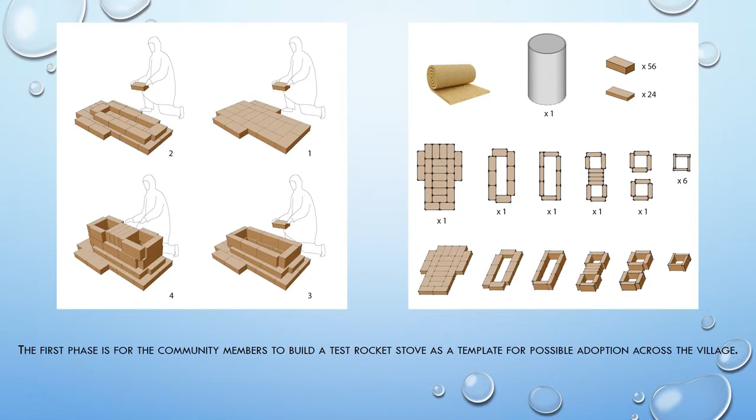It is important for the design drawings to be visually based, requiring few words to be understood. The first phase is for community members to build a test rocket stove as a template for possible adoption across the village. The hope is that eventually the rocket stove will provide a way to heat all the homes and provide supplemental heat for the laundry and hammam.

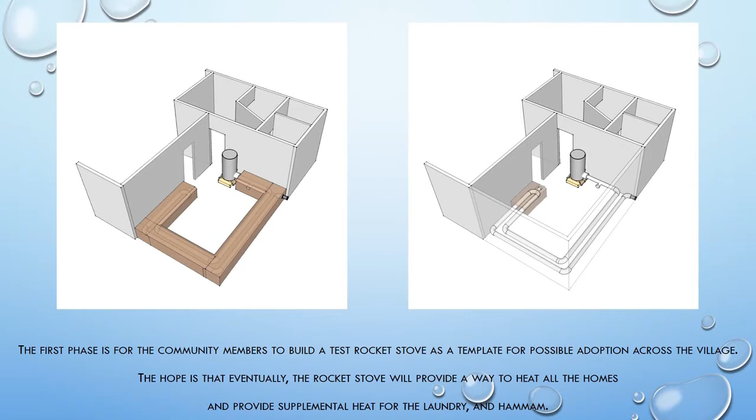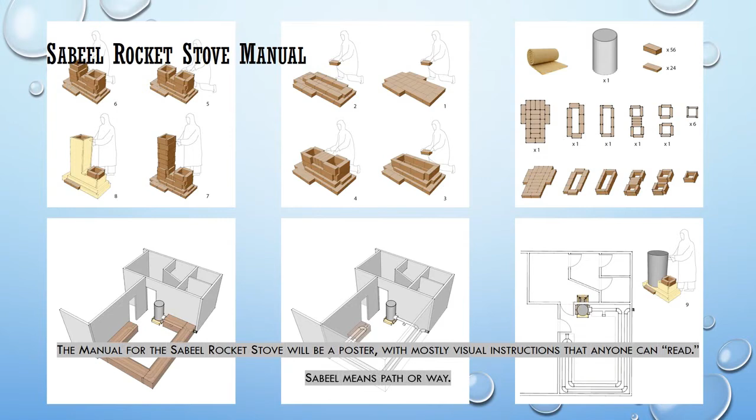The manual for the Sabeel rocket stove will be a poster with mostly visual instructions that anyone can read. Sabeel means path or way. The second phase will involve the construction of the laundry and women's gathering space, where they can wash clothes, congregate, and interact with each other as they see fit.

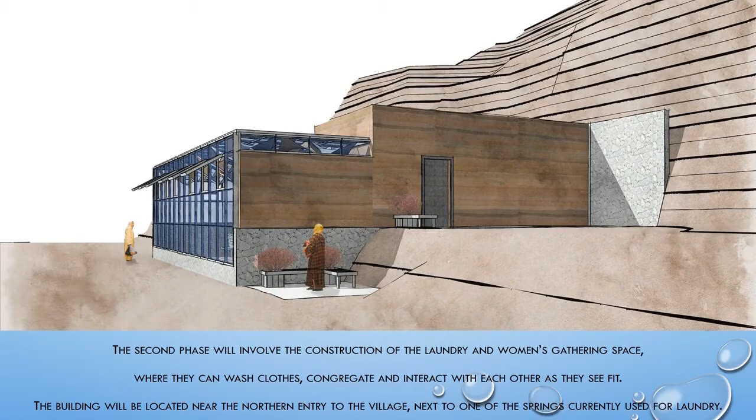The building will be located near the northern entry to the village, next to one of the springs currently used for laundry. Rammed earth and stone construction have a long tradition in the region and are in keeping with local aesthetics. The abundance of unobstructed sun favors the use of solar thermal panels.

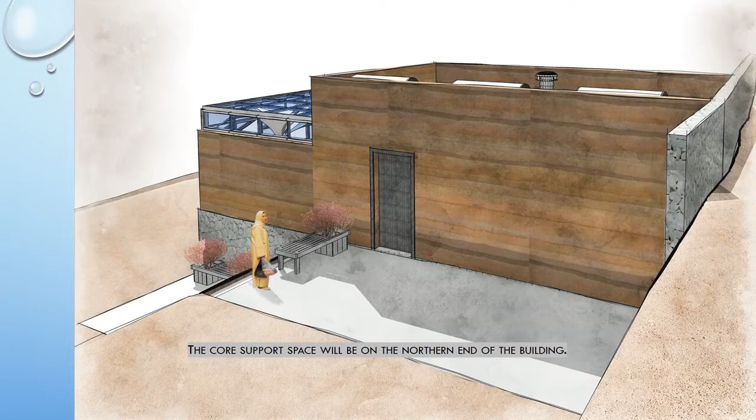The core support space will be on the northern end of the building. It will be made from rammed earth with a stone retaining wall along its western side. It will enclose the existing spring. It will house the water storage tanks and the supplemental heat source, the rocket stove.

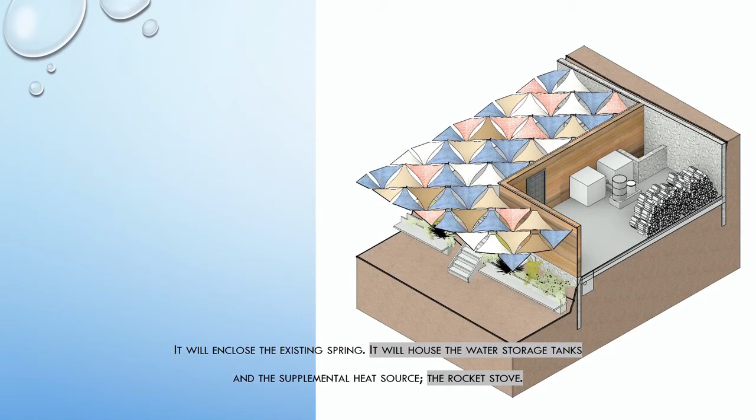To the south, the rest of the building will be a semi-outdoor greenhouse space to allow for year-round occupancy. In the summer, the windows will be opened and the ceiling will be screened using the women's rugs made of cloth clippings. In the winter, the rug screen will come down and the windows closed to maintain a reasonable temperature. It will also allow the plants to grow year-round.

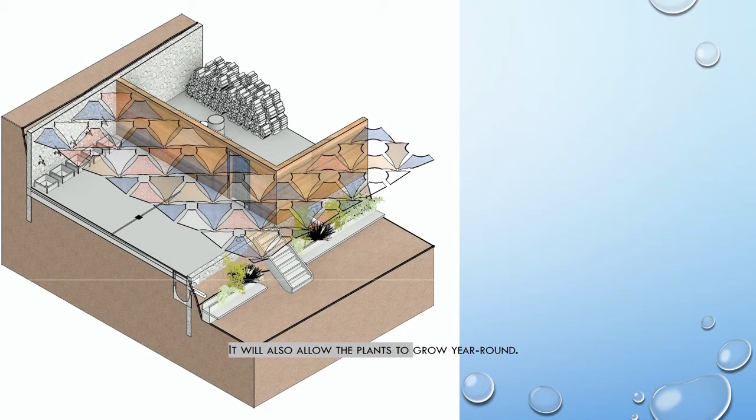The western side of the greenhouse will have the laundry area. Gathering spaces will be to the east. The roof of the support space will have the solar thermal panels, which will provide the primary heat source for the building. It will also provide another gathering area that will overlook the valley to the east.

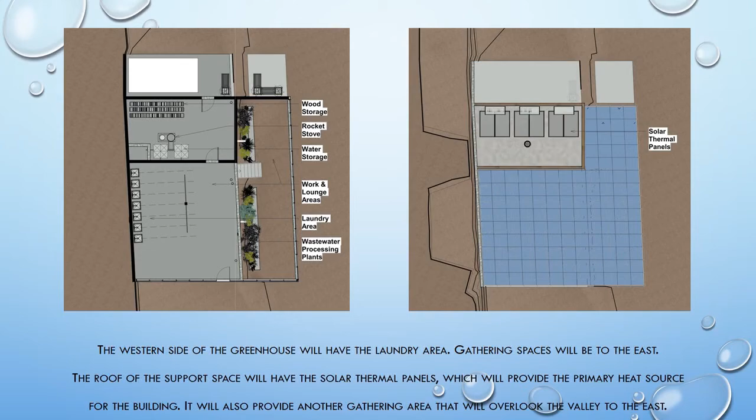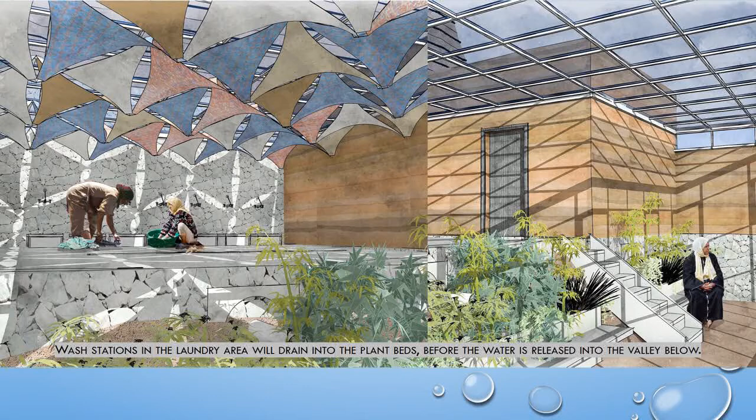Walnut and cherry trees, as well as other plants and flowers, are grown on the slope just to the east of this site. Further down is the river in the valley. Wash stations in the laundry area will drain into the plant beds before the water is released into the valley below. The space will be ideal for socializing and working together.

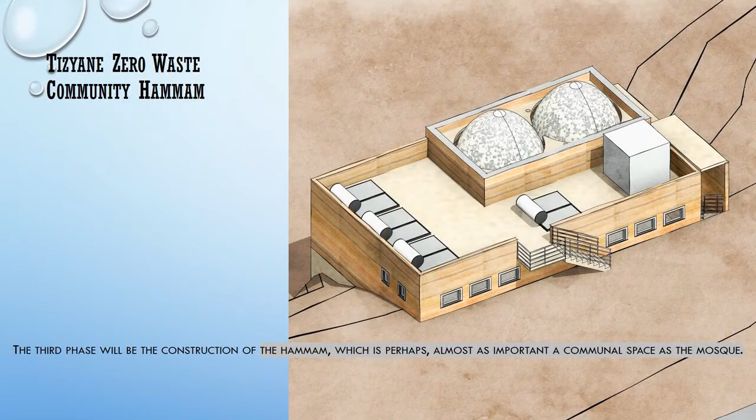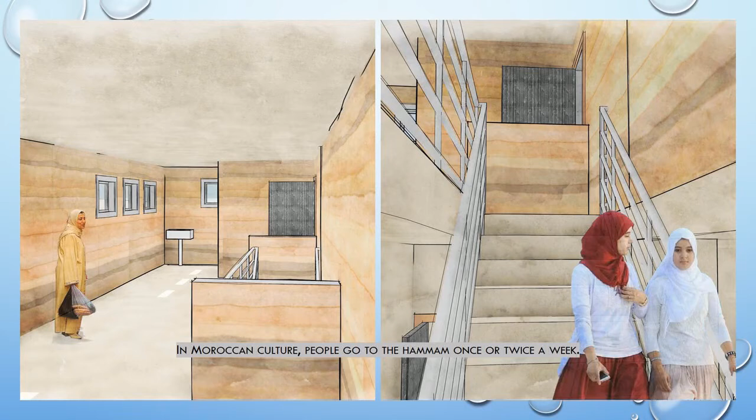The third phase will be the construction of the hammam, which is perhaps almost as important a communal space as the mosque. In keeping with the desire to take advantage of local knowledge and materials, the hammam will also use stone and rammed earth. In Moroccan culture, people go to the hammam once or twice a week. Afterwards, they sip tea and catch up on the latest goings on.

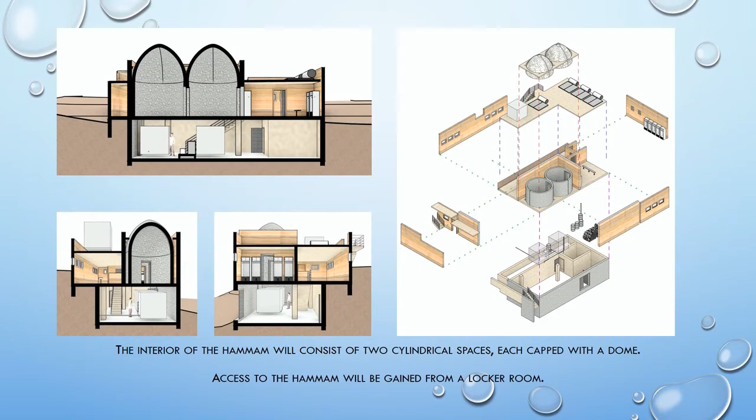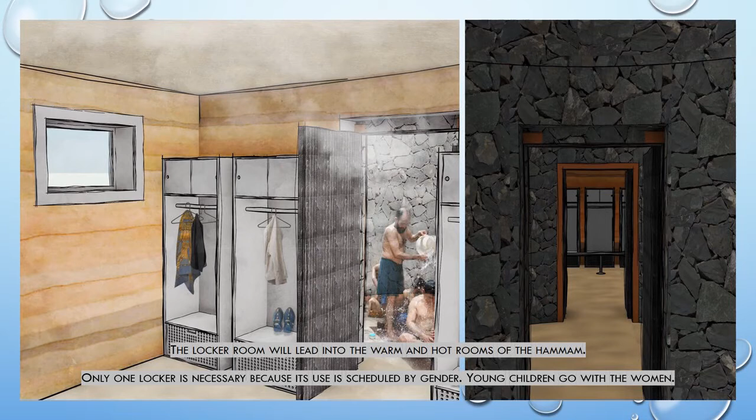Access to the hammam will be gained from a locker room. The locker room will lead into the warm and hot rooms of the hammam. Only one locker is necessary because its use is scheduled by gender. Young children go with the women. The space will be heated by radiant heat pipes in the floor.

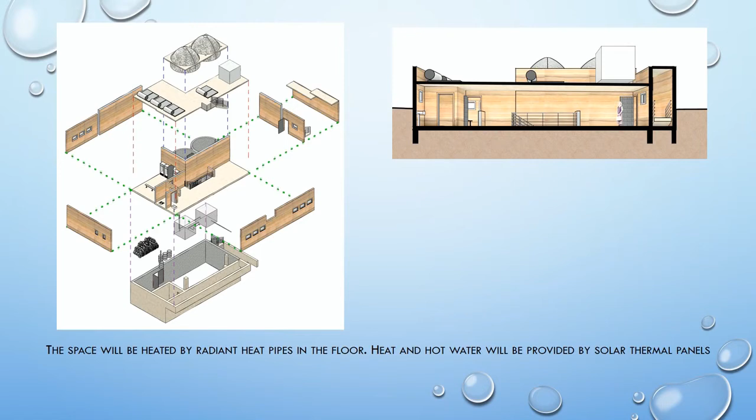Heat and hot water will be provided by solar thermal panels and supplemented by the rocket stove. In the lower level support space, water will be collected, stored, and heated for use in the hammam. The primary heat source, solar thermal panels, will be located on the roof. There will also be some roof water storage.

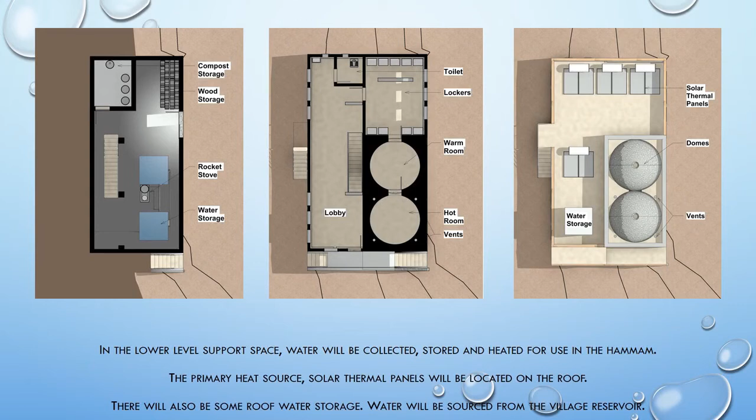Water will be sourced from the village reservoir. The lower level also houses the rocket stove, which supplies supplemental heat. Waste from the compost toilet will also be collected and stored for drying.

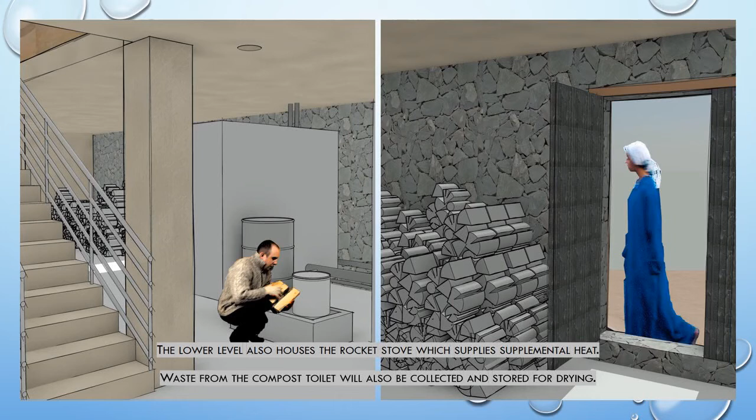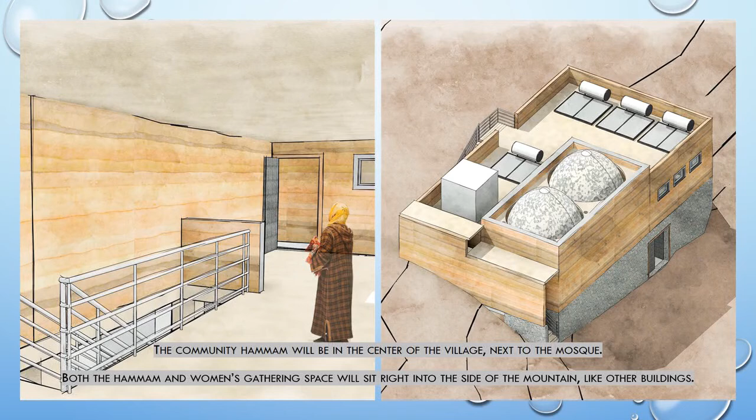The community hammam will be in the center of the village, next to the mosque. Both the hammam and the women's gathering space will sit right into the side of the mountain, like other buildings.